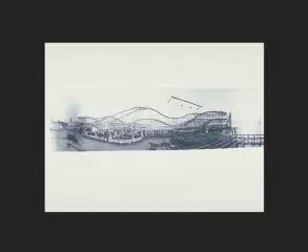And then in 1916-17, the amusement part of the pier was added. That's that wide, kind of squarish section. Right now, at one end is Pacific Park, the other end, the pier parking lot. By the way, how many people have been to the pier in the last month? All right, now that is great.

That's great. So this is when they were building the first roller coaster, and it was a man named Charles Looff, L-O-O-F-F, that built this amusement pier in 1916. So the original municipal pier is 1909, and this amusement pier is 1916.

And here's a view in 1918. You can see out here, at that point, the Hippodrome, where the carousel was built in 1916 also, as they were building the roller coaster. So the historic pier, as we think of it now, those buildings were going up at that time.

And this is a picture in 1918. By the way, any of you who are interested in pictures of old Santa Monica, not just the pier, the Santa Monica Library online has a wonderful resource of pictures throughout Santa Monica's history that you can go to and get these kinds of pictures.

This is interesting. I was talking to Jim Harris, who's the pier historian, and this actually was an electric vehicle that went up and down the sidewalk there. So we think we're ahead of the time, but some people were ahead of our time.

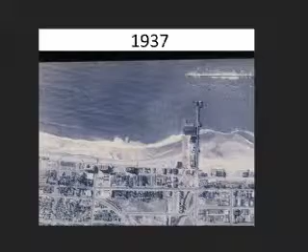Again, you can see where the coastline is. In '37, you get that view of the yacht harbor. Storms later tore the top parts of that off. If you go out when the tide is low, you'll see some of the rocks are still there, and below the surface there's still a lot of the breakwater. That's why sand keeps building up, but it isn't sufficiently high enough anymore to give protection for a yacht harbor.

The bond measure, I think it was '33, and it was built in '34. It had a false start—I think the materials they used first didn't work out so well. They actually had to build it twice.

That reminds me of an important story. Back in 1909, when the municipal pier was built, it was the first pier in the country to use concrete pilings. Sounds great, however they used local sand, and apparently it wasn't a particularly good formulation, because by 1920 they had almost 90% failure. So they took out the concrete pilings and put in old wood pilings. Those are the wood pilings we are replacing now on the pier—they've been out there for 93 years. They're due for retirement, and we're putting in concrete pilings that actually work. It's interesting history—something that was tried, but it just didn't work. They got ahead of themselves.

The one other factor of history was the gambling ships that used to be off the coast, supposedly beyond the legal control of the state of California. The Rex was one of the most famous. People used to take a launch from the end of the pier out to the gambling ships, which had liquor, gambling and entertainment, and were very popular for a few years. Then there was an attorney general in California who insisted the state did have authority over them, and wound up seizing these ships and taking them down. That attorney general was Earl Warren, who later became governor and then Chief Justice of the Supreme Court.

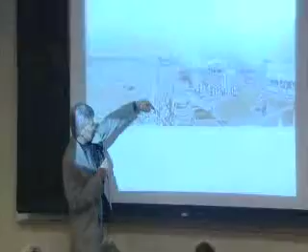This was the summer of '42, standing at the end. There was a restaurant on the upper deck on the pier looking back on Santa Monica in June or July of '42. You can see people were driving all the way out here. You could go down - there were ramps down here to boats.

There was a lower deck down here that had more restaurants. And you could see the old La Monica there, which by that time had been used temporarily for a lot of things. It had an aquarium in it for a while, and it was the city jail for a while. So it had a multiplicity of uses.

And you can see there's downtown Santa Monica in 1942, and this is the Deauville Hotel, which was a very expensive hotel right on the beach, and now that's disappeared. Was it about the 60s, I think? Sometime around then, yeah.

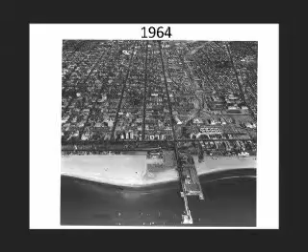Then there was a time when the leadership, or part of the leadership of the city, wanted to take the pier down, and there were various ideas about having an island that would be a resort island instead. There's a lot of detail on this because it went on for a while, but basically in 1973, the public fought that move by the city manager and some of the city council to tear down the pier and replace it with some kind of pleasure resort.

And it was really democracy in action kind of moment. So the pier was saved. It was saved for about 10 years.

And in the interim, there was a lot of filming, the Sting and so forth - the pier is used for filming constantly, we always have film crews out there. But what I'm saying is, in 10 years we saved it from the political forces, but then nature came along in 1983 with a couple of storms that just devastated the west end of the pier.

That's what you had left. The community came together and worked very hard to raise funds to ensure that the pier would be rebuilt, because the western third of the pier was gone, and they succeeded.

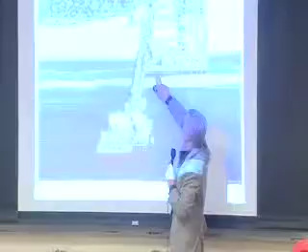And one of the things in the 90s, early 90s, was the concern about restoring the amusement park concept to the pier, and that Pacific Park that's here is pretty much where the La Monica Ballroom used to be in the old days. But what you see here, this is the municipal pier, and this is the amusement pier.

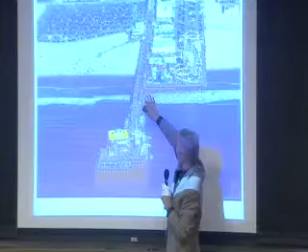In the 70s, after all the political issues of saving the pier were resolved, this all became one ownership and part of the city. But you can still see the dividing line - when you walk on the pier, there's a yellow wooden curb on the south side, that's the dividing line, because the two piers are about 4 inches different in height. The municipal pier is 4 inches lower than the amusement pier.

So that brings us up to today, or very recently, and in 2012 the city moved to try to create a new governance structure to create more focus on the pier itself. They created the department that I have, the Office of Pier Management, to coordinate - because there hadn't been, since the 90s, an individual from the city that's on the pier, walks the pier every day, becomes an advocate for the pier, so to speak, within the city.

So that was created. We deal with leasing, we deal with all the city services there. We try to primarily focus on how do we enhance the visitor's experience to the pier. And here's our website.

At the same time, back when the storm destroyed the portion of the pier, a nonprofit was created to help support that, to do the Twilight Dances, to try to market the pier, to get the word out about the pier and encourage the cultural side of things that happen there. That had been called the Pier Restoration Corporation. In 2012, the feeling from the council was that we've restored the pier, we need to be looking forward, how do we keep the pier relevant and active and a popular place. So instead, the nonprofit portion is now the Santa Monica Pier Corporation.

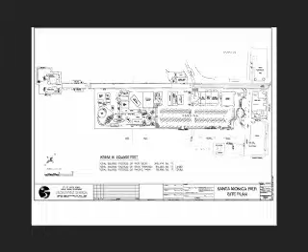So, talking about the pier. This is again the upward view of it. When we talk about how big it is, it's about 350,000 square feet of deck. About 25% of that right now is used for parking. One of the things we want to look at is that the best use is for parking. Some of it maybe always needs to be for disabled parking, but most of this we can look at, there's better public uses, we think.

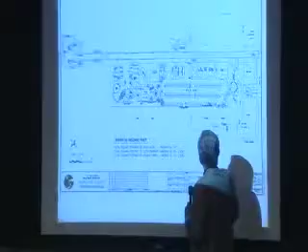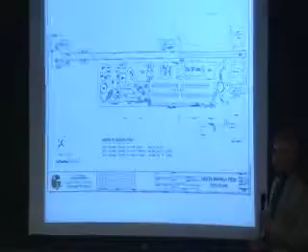The park represents about 20% of the pier. This is our walkway, our front door, going up and down from one end to the other there. So we really want to try to use our land a little better. We don't want to put buildings in here, but you could have more events, more recreational activities. We can look at things as we reduce parking and go to more public uses.

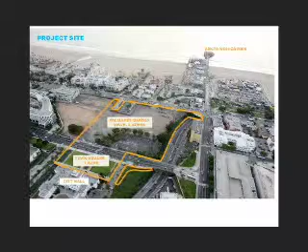This was an old slide. This is now Tongva Park and Town Square. What I'm really trying to look at here, because we're talking about urban issues, is we really want to make sure the pier connects. Historically it operated almost like an island. It isn't, it's part of the downtown, and we want to make it much more connected. This is a great time to do this, because Tongva Park has now gone in and it's open. Olympic Boulevard is going to be opened here. The Esplanade to connect to the light rail is going to come straight to our Pier Bridge. So this is the time.

This is the new park, Tongva Park, a wonderful facility. If you stand here, it looks right at the pier, so we couldn't be happier. And it creates a new way for people to come to the pier. They can park at the Civic Center parking lot and walk through the park. So we need to really examine how do we make that walk more pleasant, and encourage people to take advantage of the park as part of the pier experience.

The other thing is the Esplanade. The Esplanade is rethinking Colorado Avenue, connecting from the train station, the Expo train station at 4th, right to the pier, to the front door of the pier. We want that to really be the backbone, connecting the pier to public transit in terms of Expo, to 3rd Street, to the Civic Center, to the park. So it's really important to design, and we want to be very proactive in relating to that.

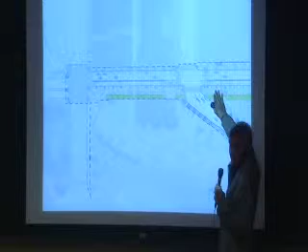It's going to mostly feature a much larger sidewalk here, so we really emphasize pedestrians. We're going to de-emphasize cars. There will only be one way westbound, and there'll be committed bike lanes, and that'll come right to the Pier Bridge. So now, when I turn this over to Salim and he talks about the Pier Bridge and the bridge reconstruction, we want to make sure that you have that same experience going right down to the pier deck.

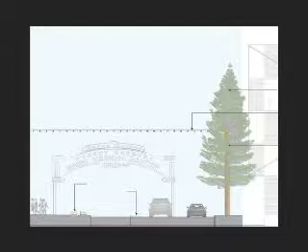So now I want to talk about what we're doing at the moment in terms of replacing a portion of the pier, those 93-year-old wooden pilings, how we're getting their retirement organized. The first thing I want to say, though, is we're about halfway through with this project, but the pier has been open and will stay open throughout all of our construction activities. We want people to come down.

In the mornings when I walk around, I see a lot of people down there with cameras, video recording the construction, because it's pretty interesting. I invite you to come down and take a look to see how a pier is really built.

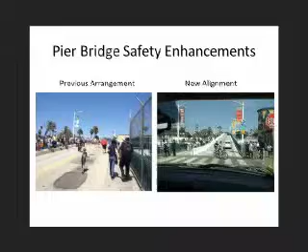Before we get to that, I want to say that one of the things looking out my window, because I'm right up there, the conflict between cars and people and bikes scared the heck out of me. We had to find something, and the police chief and engineering working together came up with an interim solution, and you'll hear the long-term solution from Salim.

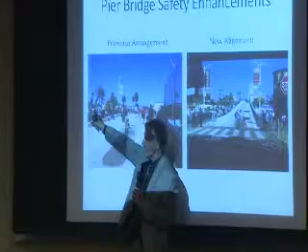Before, they had these high curbs, which were very narrow, and I don't know how anybody with a stroller or a wheelchair got down them. They were forced into the street. One of the things we found was that these things were hollow, and the rail height was all wrong, because they added those at the end of construction and didn't change the rails.

We were able to take those out and create a real walkway with the protection of K-rail, giving us some separation, and the bike lane is shared bike lanes, with a sign there. I can't say scientifically with clicking buttons, but watching and walking here, we've probably at least doubled, if not more, the number of people who bike to the pier now.

It just creates a much better environment, and having all the width on this side so people feel a little more comfortable, so you can take a stroller down. But again, it's the short-term solution, because we still have the issue that this bridge is a 10% slope, which is pretty tough for people, particularly people in wheelchairs, people pushing strollers. So this is one of the things we want to address with the pier bridge replacement.

So now we have construction, and we say, what's up with that crane? We are replacing the portion of the pier. Those of you who remember those awful metal plates that have been there since 2002 - they've been there 10 years.

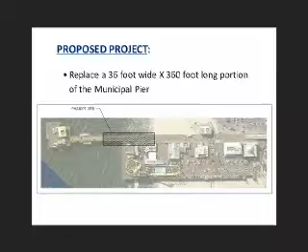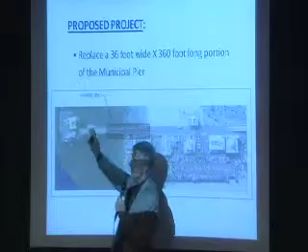This portion of the pier, basically from in front of Pacific Park out to about the middle of that narrow neck, is what's left over water of those wooden pilings that are 93 years old. This stuff to the west was what was replaced after the '83 storm, so it's very sturdy, but this part was really very challenged. So that's all being replaced, which means all the pier that's over water will have concrete pilings and be in good shape.

As I say, the goal is to get another 100 years out of it. So that's all going to be replaced with concrete, so you'll be walking on top of concrete? No, it'll be just like what's out there. The question was about whether it's being replaced by concrete - the pilings are concrete and the substructure, but what we're returning to is an all-wooden deck again. Is that going to be easy to walk on? Well, it's a wooden deck - you bring a girl, I know, the high heels question.

But we have a tradition of a wooden boardwalk. What happens with wooden decks is as they age, they expand and contract, so the space between the planks will get larger. The question was, could we use something other than wood, or some synthetic wood that looks like wood instead of replacing the real wood? The city has a strong feeling about using real products, not chemically treated products, for this deck, to be a genuine wooden boardwalk.

Doesn't it cost more than just replacing it with some other material, instead of every 20 years? Well, you could replace it with asphalt.

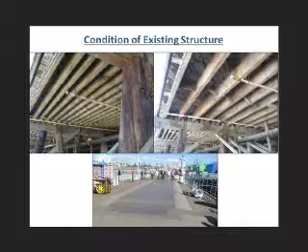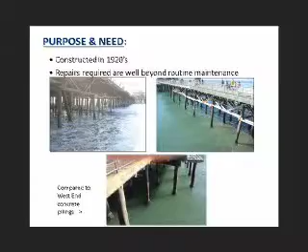Underneath, it's not only construction-wise starting to get bad, but the utilities—we're going to rationalize all the utilities underneath. The tradition, unfortunately like a lot of things, was when new lines would go out, whether electrical, telephone, or now internet, they were just kind of added and abandoned, creating a big maze under there.

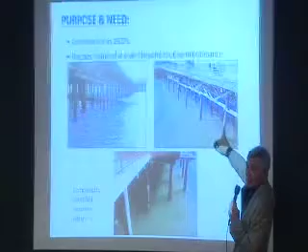So this is the concrete pilings as opposed to these wood pilings. Do you see this? There's a little rubber gasket around this because it's already eaten all the way through, so that's all going to be gone.

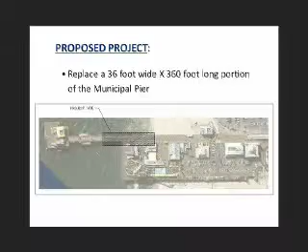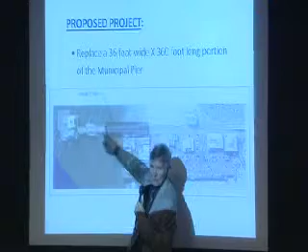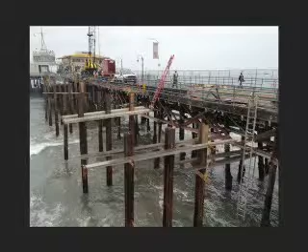Let me go back here. So this portion is out over the water. To do this work, we created a parallel temporary trestle so that access was maintained throughout the construction. This is the building of the parallel trestle, and then you can see it completed so that this work can take place.

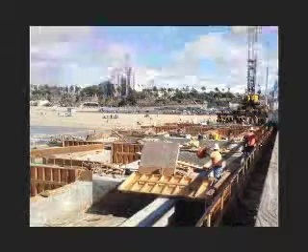Right now, they're pouring the concrete substructure. They've done most of the pilings; they just need to do a few more. We deferred the pilings in front of the park until winter so we wouldn't have issues with the public getting easy access. Once the concrete substructure is done, they'll start putting the wooden deck across. We're hoping to be done by the end of March, so it'll be ready for spring break.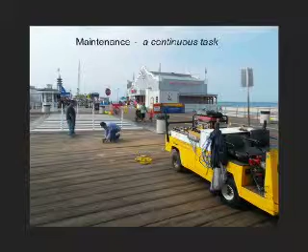For maintenance, the deck boards are like the Golden Gate Bridge, where you're constantly replacing them. Also painting and nails—the hardest part is where the cars are. The cars destroy the wood, and quite frankly any kind of fastener, because the vibration causes abrasion and also makes the nails pop up over time. We do a lot of painting—we just painted the trim on the carousel building, the Hippodrome—so it's pretty constant because I have a crew of 3 to take care of the pier.

This is the new restrooms that were put in around 2008, I believe, to really increase the capacity. No smoking on the pier—I think that's what I say more than anything else I say all day. We have signs in 10 languages so people can leave their cigarettes, because quite frankly there are 2 groups that predominantly smoke.

A lot of people who come from countries where smoking isn't banned, or is only restricted outdoors, are very compliant when I explain it to them. It's not like they're doing this on purpose, but I do explain it's a wooden pier, and we've had several small fires out there. Boards abrade over time and dust gets in between them, so a cigarette dropped between those boards will smolder and pop up.

Well, there is a problem from where the cars are parked. Motor oil is an issue too.

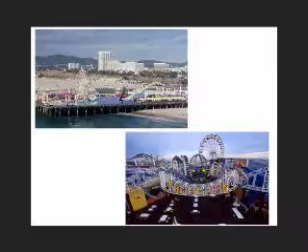Then you have Pacific Park. Does everybody know what's unique about the Ferris wheel? It's the only solar-powered Ferris wheel in the country. So there's Pacific Park, and we also have fishing decks—one on each side, and one on the west end.

It's interesting, the pier has a life every day. When I come in the morning, there are a lot of runners, people strolling, and some fishermen. Over the course of the day, more people come for the recreational activities. In the evening, they come to eat and listen to music. Then in the middle of the night, the decks are packed with fishermen, and sometimes they'll bring their families—there'll be a kid in a little basket while the family's out there fishing. So over the course of the day, different people use the pier differently.

As for events, the Pier Corporation's key focus is to do a lot of them. Way Over Yonder was the first time the Newport Folk Festival had a program outside of Rhode Island, and that was just last month. We also have something called Roga, which runs quarterly—it's a run combined with yoga, led by yoga instructors, and it's free for the public. There are also outdoor movies, and of course we have to mention the Sting.

We have paddleboard races, and I mentioned the Twilight Dance Series earlier. This weekend we have a program emphasizing science, technology, engineering, and math—kind of like a science fair for adults. So we hope people think of coming out for that.

The arcade—I'm always amazed that in the age of electronic and video games, this does well, but they do extremely well. You can also rent bikes. As for restaurants, we have a new one opening—this is the sketch of it, and there it is. It opens next Monday, Al Mare, an Italian restaurant, right next to the Carousel or Hippodrome building.

Just going down some of the food choices: Soda Jerks in the Hippodrome, Ice Cream Parlor, Rusty's Surf Ranch, Santa Monica Seafood, Bubba Gump's, Pier Burger. So these give you some of the choices. And Mariasol. Plus we have carts.

I don't know if you know, we have carts that have fresh juices and fruit. We have a cart that has German sausages. We have a popcorn and candy cart. So, try to get variety. We're actually rotating these out, just in case anybody's interested. We do it periodically because we want to keep giving opportunities for new carts, and we really encourage diversity of food carts, so we try to mix that up.

We're trying to be responsive to that desire to see more food choices. And of course, Pacific Park has its own food court with the chain stuff, the Taco Bell. But they give you a lot of choices: Taco Bell, Pizza Hut, Coffee Bean, and the funnel cakes and things like that. All good, healthy foods.

But we do have, as I mentioned, carts, and we have performers. I don't know if you've seen, we have street performers, and people ask me, do we select the street performers? No, the street performers, anybody who wants to be on the pier or the promenade needs to get a license from the city, but we don't choose talent and so forth on the pier because there's very limited space, because obviously performers are spaced out between each other so that the flow of traffic can happen.

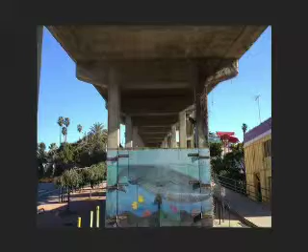This is under the pier, the bridge, from the oceanfront walk. This is the spectacular view that everybody stops for. Rod mentioned that little cigarette sign - we had like 10. When you go out there, you don't hear much English - a lot of international tourists, national tourism, and local regional tourism is also very important when it comes to the pier.

Like I mentioned, it was built in 1939, 1940. It doesn't meet current seismic standards structurally. It's standing still, it's carrying all the load as is, in a pretty good condition. However, because the standards have changed since it was built, it's not meeting the codes, and there are some deterioration on the concrete sections.

So it's almost time, about time, to retire the structure and build a new structure that also addresses some of the access issues to the pier itself.

The pier sign - Rod mentioned it's a top 10 most Instagrammed location, the pier and the sign in the world. People just jump on the street, take pictures, and more, all day long.

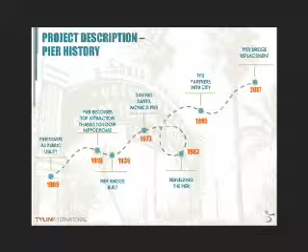The setting is iconic, historical, a world-class destination. It's a great asset with a rich history. Rod mentioned it in detail, but I like this roller coaster history of the pier - when it was built, then partially destroyed and rebuilt, and moving forward, we're looking at 100 years back and 100 years forward. As far as the bridge replacement, we're looking to open the new bridge in 2017.

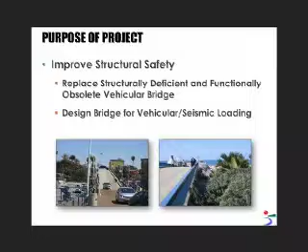Again, the main purpose of the project is to improve structural safety. It's a structurally deficient and functionally obsolete vehicular bridge. Still, the new bridge design would address carrying the vehicular load and meet current seismic codes.

Throughout our meetings, we have a great staff with great history, knowledge, and feeling for what Santa Monica is, and what Santa Monica residents, businesses, and visitors need. We got together with the city, met with the Pier board, met with many other community groups, and based on our conversations, we came up with these guiding principles for the new bridge design - how the new bridge design should be. With the new bridge, we enhance the entire experience, which starts from the pier sign.

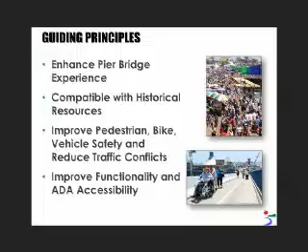That's the front door of the pier, and it will still be compatible and preserve the historical values, while meanwhile improving overall safety for pedestrians, bicycles, and vehicular safety, reducing traffic impacts, and improving functionality and ADA accessibility.

One thing I'd like to point out, in transportation planning we have 3 basic modes: pedestrian, bicycles, and vehicular modes. It's very important to understand all these 3 modes are equally important. Not one of them goes over the other as far as priority when new developments come - they all have equal priorities.

We've done many public meetings, like I said, with the Pier Board, Landmarks Commission. We had a community workshop where various community members came and met with the design team, bridge engineers, bridge architects, and the city, got a really good understanding and got their questions answered, and provided the designers with what they really want.

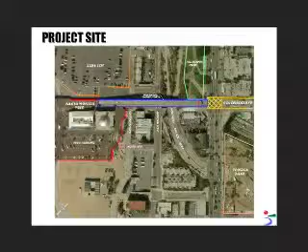Funding requirements - there are certain requirements that have to be met for any bridge infrastructure project, replacement, retrofit, or maintenance projects. There are geometric site constraints, topographic constraints because of the elevation differences between the Ocean and Colorado intersection, the beach level, oceanfront walk, and the pier. These are all different elevations that need to be considered.

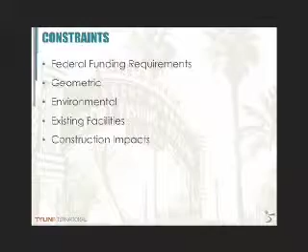Environmental issues - every project has initial community input and conceptual design. That's where we are right now. Once the conceptual alternatives and designs are produced, those are basically the baseline of the design going forward. They are vetted through an extensive environmental review process, which considers noise impacts, construction impacts, historical resources, historical impacts, traffic impacts - all these things that affect the environment.

That's one of the constraints we also study during the project - existing facilities. Rod talked about the Aquarium, right immediately adjacent to the Pier Bridge. Obviously during the demolition, with vibration of the concrete, that will somewhat affect their operations and the exhibits there. So there will be some impacts - they might need to be relocated partially - but all these will be vetted during the environmental process, so we can come up with a plan to mitigate these impacts.

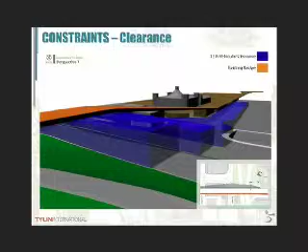One of the most important is the geometric constraints - why the bridge is the way it is. These blue squares represent the minimum clearances that have to be present for safe traffic flow underneath the bridge for the roadway network underneath. These are different views just to give you an idea of what is required to be there. So basically the existing bridge is pretty much right at the limit, meeting the minimum requirements, and the new bridge would have to still meet these requirements as well.

The pier deck is actually very low. The minimum height requirement is 15 feet for any roadway, for a highway, and the deck itself is only about 10 and a half feet in height. So if this bridge were somewhat wider, that would affect the traffic flow right here because it wouldn't provide the minimum required clearances.

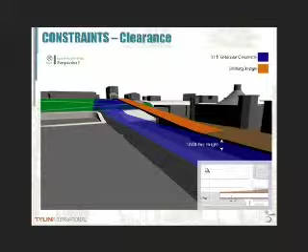Every time we talk about how we demo this bridge and how we build a new one without affecting any access, without affecting anybody - how do we do it? There are basically a couple ways to do it, two ways to do it. One is very similar to the pier reconstruction.

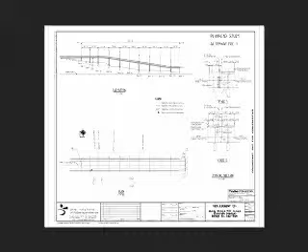We basically build a temporary walkway, temporary access, either on the north side or the south side of the existing structure, and route the traffic on the temporary walkway and demo the entire concrete structure and build a new bridge. The other way is stage construction.

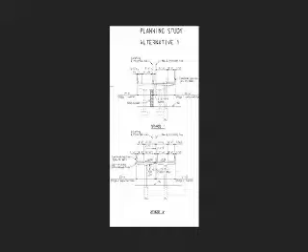Because the existing bridge has 2 columns, we could basically put a temporary column and cut the bridge in half, keeping the other half still in use by pedestrians and bicycles only. Once the new portion is built, we route all the traffic on the other side, demo the existing, and build the other section.

So these are the things that need to be considered, even during the concept design.

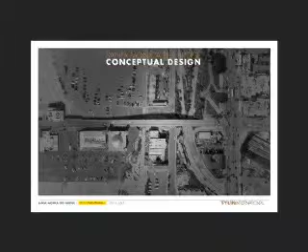Our designers came up with 4 alternatives, and these alternatives didn't just grow by themselves - we started with a baseline replace-in-kind bridge.

As I mentioned, the existing bridge is very narrow right now. It used to have 2 vehicular lanes with 2 sidewalks, very narrow, 4 or 5 feet wide sidewalks on both sides. Now it's a little bit better, but to provide wider sidewalks on both sides and bicycle lanes along with vehicular lanes...

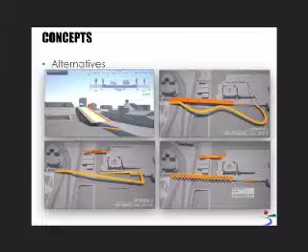...the new bridge with the replace-in-kind option would be much wider, and it would not match the existing pier wood deck. It also has issues with vertical clearances at the bottom, and it doesn't match the width of the entryway, as far as preserving the pier sign.

So the other option was, why can't we keep the existing portion? Build something somewhat similar to what we have, and have this portion detached with a smoother, longer slope. The current slope is 10%.

ADA requirements are maximum 5% straight or 8%, and you would have flat landings every 30 feet.

So was there no plan to just serpentine the entire ramp, even the vehicle part? The question was, how about getting the vehicle serpentine thing?

Well, the idea is vehicles don't have any problem with a 10% slope. The idea of providing a smoother slope is to comply with the Americans with Disabilities Act - and not only to ADA, but I'm going to refer to the guiding principles to enhance the pier experience.

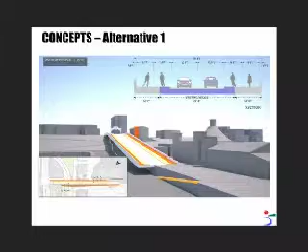So I'm going to fast forward and focus on two alternatives here. I talked about alternative one, which was the very basic starting point that we had. And alternative 4 - I also wanted to mention how we came up with the renderings during concept development. Basically everything starts with pen and paper.

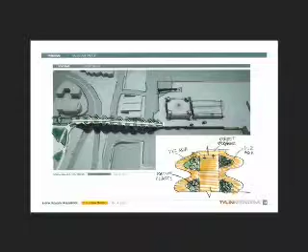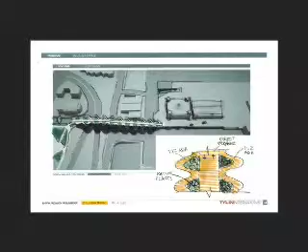This is what was drawn by our designers, having a straight walkway in the center. So whoever wants to take the shortcut, wants to run, can take that in the center, and people who like to have a view, or who have limited mobility or disabilities, could take the longer route with a smoother slope.

This walkway would have much less slope, but still would follow the slope of the existing, somewhat matching the existing conditions, and you would be able to get in and get out. These are just some ideas designers threw out during the conceptual design.

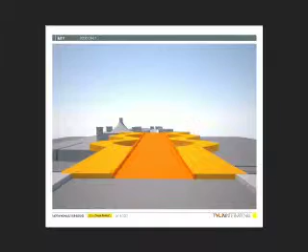So the next thing they do is basically computerize and model the design. This whole design was modeled in 3D space - you can see it in different views and from different points, with lighting and shade.

I'm going to go back to alternative 4. When I was talking about how we build the new bridge, I mentioned we would not be able to provide vehicular access when demoing, whether with stage construction or a temporary walkway. But we still need to keep vehicular access because we have Harbor Patrol, police, deliveries, many things that need access, and also parking.

So we said we have to build a temporary bridge from the Appian Way at Moss Avenue, since Appian Way is pretty much at the same elevation as the pier deck. If you were to roll, it would be just a straight shot.

So the first thought was that a temporary vehicular bridge would provide the solution. But then, going back to the first slides, we saw people pretty much dominating the pier itself, used mostly by people, not much by vehicles. So we thought, why don't we separate it? That way we have more space, we don't have to shut down the bridge itself when it's crowded, and it could be open just for pedestrian and bicycle traffic only.

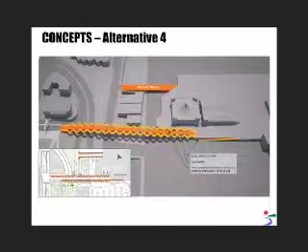That's why I'm basically focusing on Alternative 4, which proposes a new vehicular bridge at Moss Avenue, and a replaced bridge somewhat similar in width with an ADA path. This could be used for emergency or limited use only, like whenever a fire truck has to go down straight, or an ambulance still needs to use that route.

Meanwhile, we also realized there's a missing connection while we're building this bicycle network in the city, and we have this great regional bike path on the beach. How do we connect this? We basically said, do a simple ramp from the pier deck down to the parking lot, so you have continuity on your travel, coming down from 4th Street with the new light rail Esplanade, and down to the new structure. Again, these are just simple representations.

It's not something that's designed, just basically lines. The actual final design will come in future phases, after these two alternatives are vetted through the environmental impacts. These two alternatives have somewhat different environmental impacts that we have to look at, to see which alternative provides the most mitigation and has the least impact as a whole project.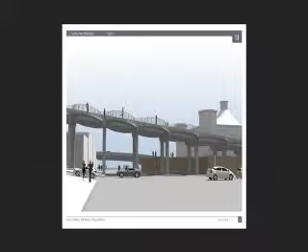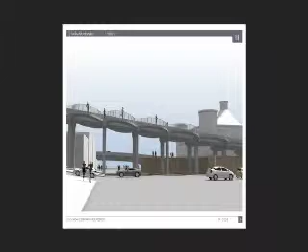Going forward, the design moves from lines to somewhat actuality. When you look at this, what is this thing? So we got to put some people, some light, some background. You see the Moss Avenue bridge in the back - this would be the new bridge, and this is the ADA path that you would walk on.

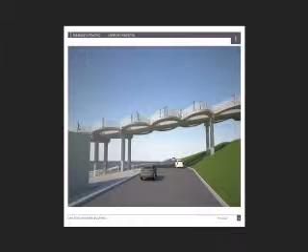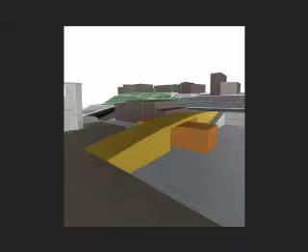So sometimes these are not good enough. This is just a line model of the Moss Avenue bridge - these are sometimes not good enough for people to understand, so we've got to actually put the reality background in there. This is the existing picture that we have of the Moss Avenue Bridge, and this is one of the bridges. The columns are just to give you some idea, but it could be different ways and different shapes.

At least this gives you some idea what a bridge would look like there. This is from Oceanfront Walk, this is how it would look. Again, when you do a project, there are a lot of different elements - there are art elements, there is landscaping. Those are the most important aesthetic elements that we have to put through. These pictures don't have any of those, because, like I said, those belong to the final design sections.

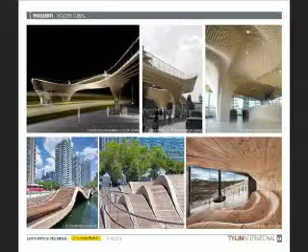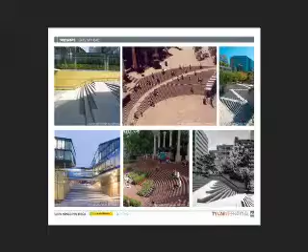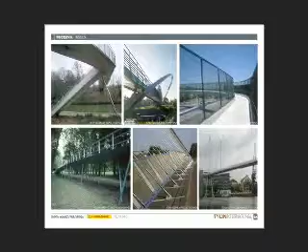And how do we get our inspirations? There are so many cool things around the world. Our designers look around different cities, different projects with similar settings, how other people like it, how it's been built in different places in the world. These are some other things to get your mind, get your inspiration going. Some other cool things about sustainability - again, mostly I talked about concrete structure, very boring, right? These are the cool things that could be added to our lives, that bring more sustainable life, more life into our daily hassle.